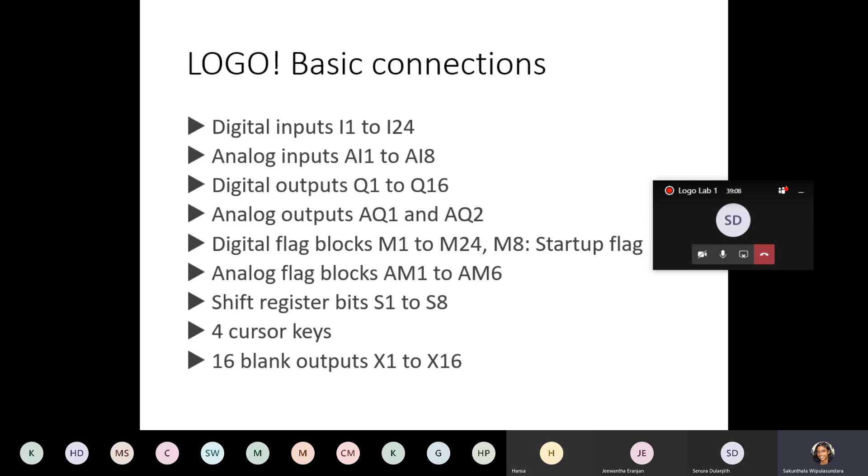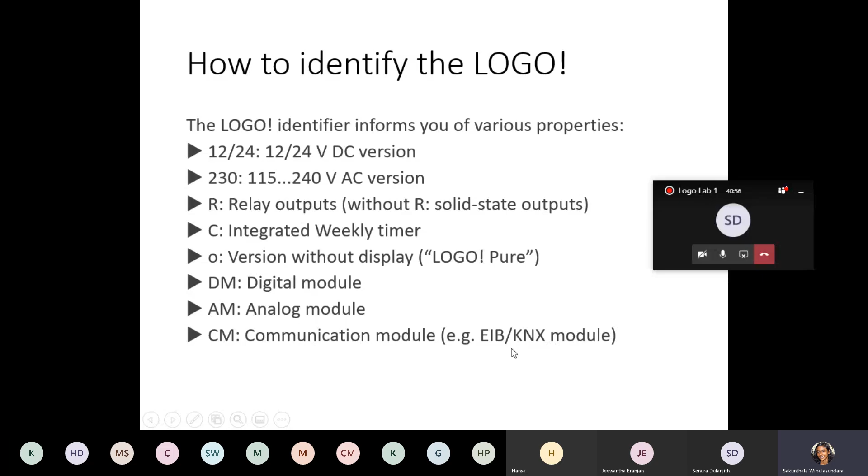Now the question is, what are communication modules? Communication modules are network modules. If you want to get the LOGO in a network, you can connect CMs, communication modules. For example, EIB/KNX, that is one kind of network that the LOGO supports, right? So you can connect such network modules as well.

And when you are selecting a LOGO, what you will basically look at will be the number of inputs, digital or analog, the number of outputs, digital or analog, and when you take digital, whether the outputs should be relay type or transistor type. I think you are aware of the differences. The transistor type outputs can do fast switching and they give DC outputs, whereas the relay type can accommodate AC or DC but is slow in switching frequency. Then the working voltages, voltage classes, will be considered. Also, the cost should be optimized when you are selecting expansion modules and main modules for your LOGO application.

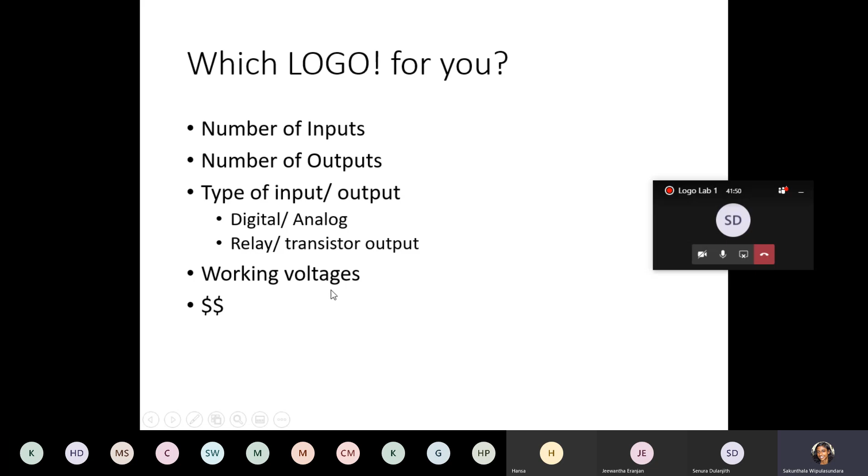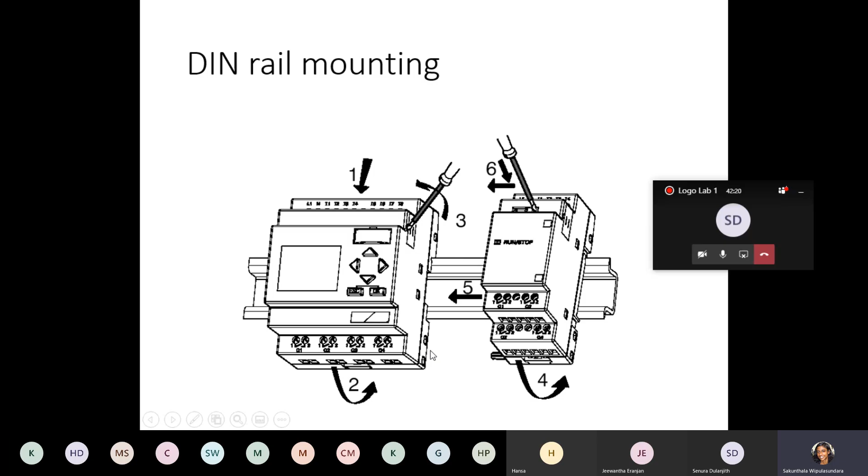And this is how you mount. You have the DIN rail running behind this, the rail that is very commonly used for many PLC mountings. You have the main module, you have the expansion module, you slide it along the rail until it fits into the grooves of the main module, and you lock it securely with the latch here. When the latch is in place, the two modules are securely fitted together so that the signals can transfer from one module to the other. There should be no gap.

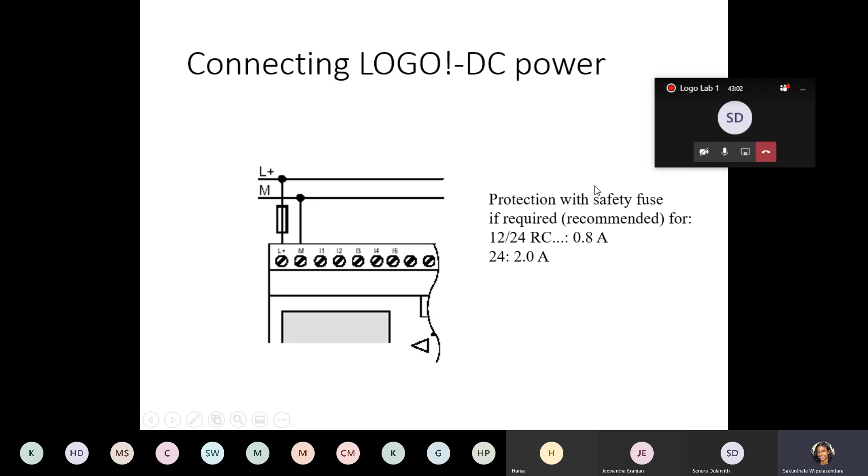All right, and then connecting, wiring. When you are going to wire the LOGO module, whether it is an AC module or DC module, it's better to use safety recommendations, right? So here there is a phase safety fuse connected. And when you are wiring for the AC version, normally varistors are used.

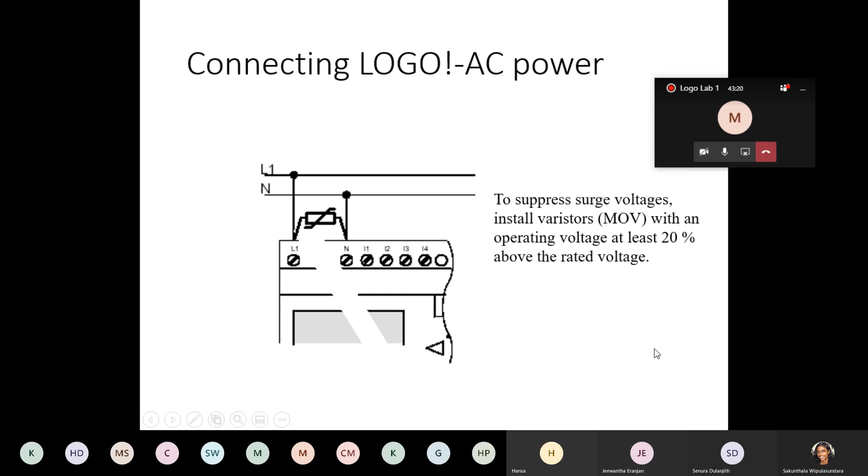Right? So what is special about these LOGO modules is, in the LOGO main module, I1 to I8, as I mentioned, there are 8 inputs. If you want, you can use all 8 as digital inputs. Or else, you can use I1, I2, I7 and I8 as analog inputs also. They will support 0 to 10 volt DC analog signal.

Right? So that means I1 and I2, I7 and I8, those 4 inputs can either be analog voltage inputs or they can be wired as digital inputs. Whatever you wire them as, the program decides how you are going to use them.

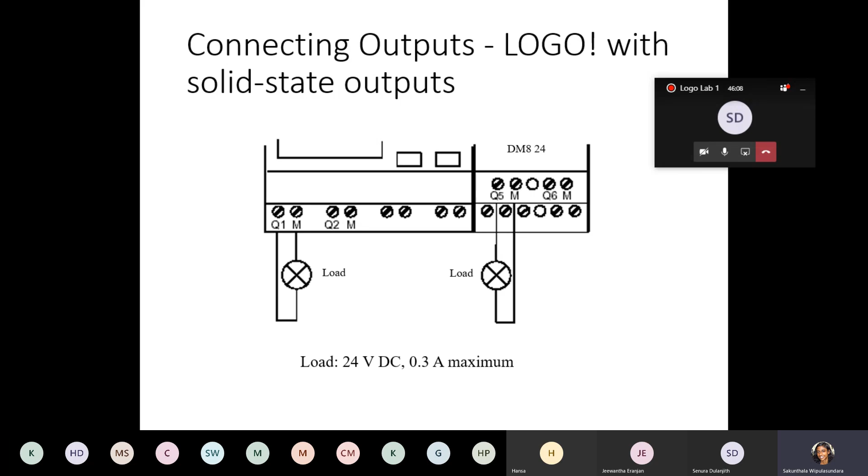Right? So you can go through these slides, and when you get an opportunity to connect an actual LOGO to a load, or to a sensor, these things will come useful. Next, we will move on to programming. So we are going to start our labs with programming so that you are familiar with how you write programs and what are the programming blocks of the LOGO module.

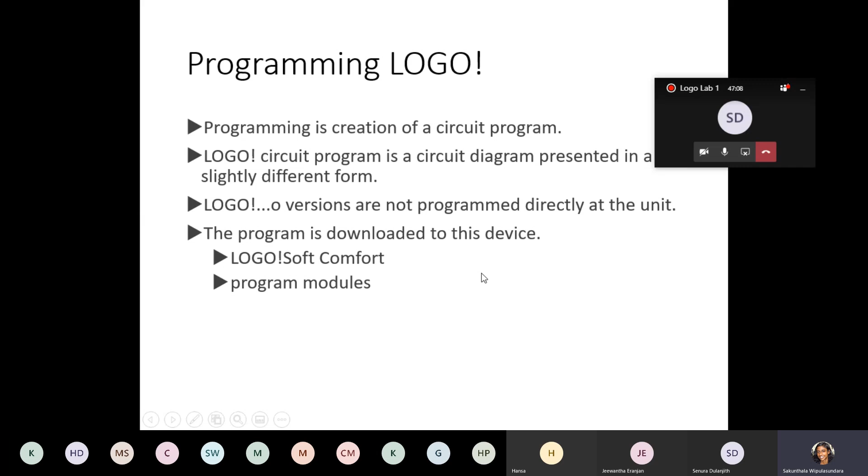So as I said, the LOGO O version does not have a display. So they are not programmed directly on the unit. For the LOGO O version, you have to always connect the LOGO to a PC or a laptop to program it. But if the LOGO is without an O, that means it has the on-module display. You can either program it using the display, the key set on board, or you can program it using a computer. Both options are available. When you are programming it using a computer, the software that you use is called LOGO!Soft. And that is the software which I shared with you.

Terms related to the LOGO program. So, when you are programming the LOGO using the key set, using the small screen on the LOGO, you should specially remember these terms. When you are programming it using the software, these terms are available, but you have a lot of options because you can even refer the help. When you are using the LOGO display to program, the facilities are very limited. You cannot refer the help. Therefore, you have to be thorough with the terms, or else you have to refer a catalog while you write the program on the display.

Connectors. The first most common term that you use are connectors. What are connectors? Digital and analog inputs and outputs are all called connectors. Digital connectors are named as capital I1, I2, I3, I4 and so on. Whereas analog input connectors are labeled as AI1, AI2, AI3 and so on.

Then output connectors in LOGO: digital output connectors are labeled as capital Q1, Q2, Q3 and so on. And analog output connectors are labeled as AQ1, AQ2. Right? So I can't say so on there. Why? Because analog outputs are limited to 2. AQ1 and AQ2, that's it. Is that clear?

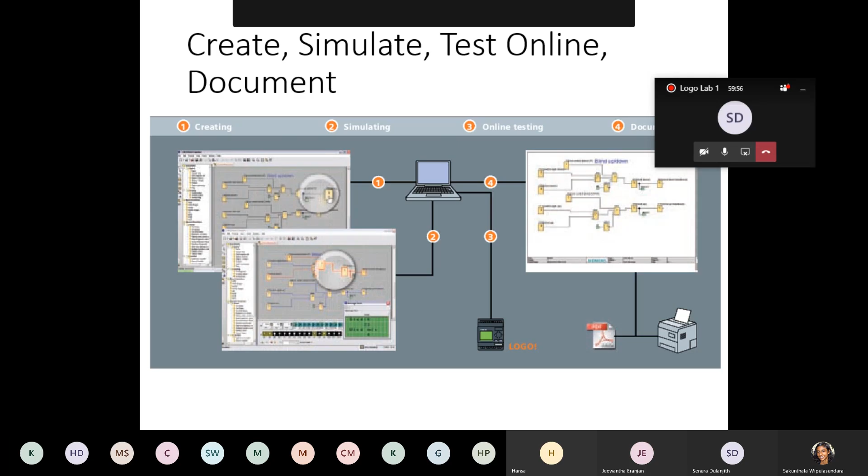Right. When you look at your Logo module, as you start your program, you will find menus. You have the program menu, the card menu, clock, right? These things you can read for additional information, and I will explain them as I come across them. The programming menu will have edit. That's the most important thing you will require at this point, to go to program mode, go to edit mode and write the program. This comes in useful when you are using the display on board. When you are using the computer to program, you don't need to pay much attention to these menus, because when you load the program, the Logo module will go to stop mode. You load the program and run it again.

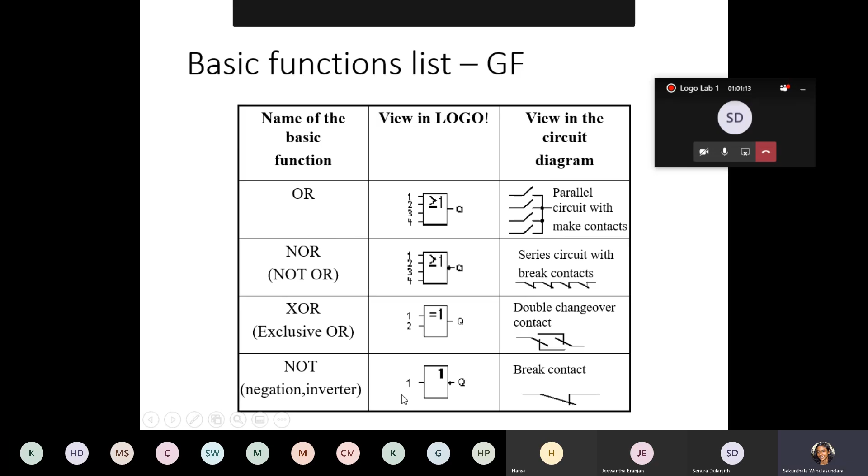So just to give you an overview, not to have you memorize these things, basic functions are these: AND operation, AND with edge evaluation, NAND, OR, NOR, XOR. These are all the GFs, basic functions. Then special functions. We have on delay timers, off delay timers, on off delay timers, retentive on delay timers, relays, wiping relays, pulse generators, counters, message text. So you can see that the number of special functions is larger.

And as the Logo evolved from version 3 onwards, 3, 4, 6, 7, 8, the special functions increased in number. So newer Logo versions have more special functions than older versions. Therefore, using new version Logo software, you can program an old Logo hardware module, but using old Logo software, you cannot program a new Logo hardware module, because as the Logo evolved, special functions have increased.

Right. So now let's move on to some hands-on exercises. When we are programming the Logo module, we can use many programming languages. You must be familiar with computer programming languages such as C, assembly, VB. The languages I am going to talk about today are different from normal computer programming languages. These are PLC programming languages, meant for PLCs. There is a standard, the IEC 61131-3 standard, right? When you read the literature, you will find that information. Under that standard, there are 5 programming languages for PLC programs.

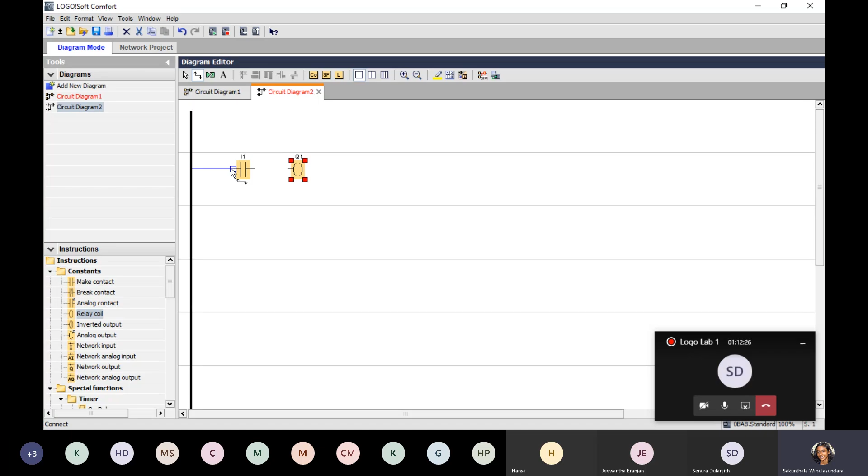Next, to represent the bulb, we take a coil. Again, you can change the label. By default, it has taken Q1 digital output. If you want, you can change the label. I leave it as that. Then I connect from the power rail to the input and to the output. And there is no 0 voltage line. The network terminates here. Right? So this is your very first ladder program.

Alright, so are you working with me? Have you come up to this point? Alright, everybody? Yes.

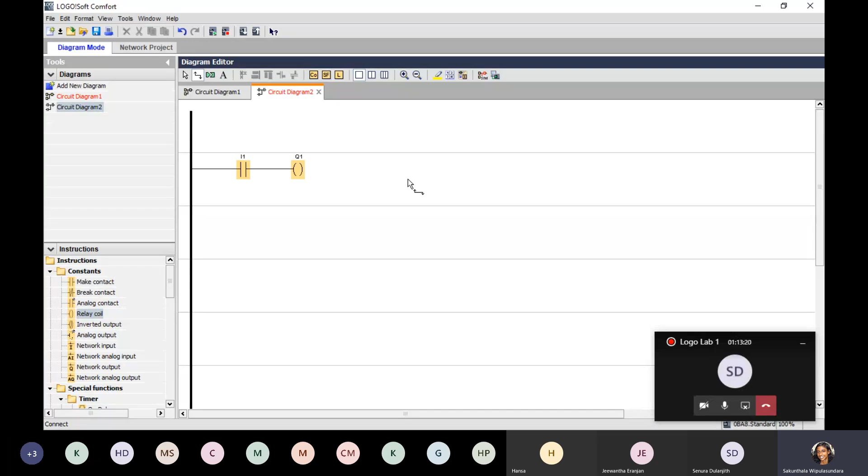Okay, right. The next thing we do is, since we don't have the physical hardware to load this, and even if we do, we first simulate, right? How do you simulate? You go to sim. You can see a switch and a bulb. You run the simulator, you turn on the switch, power will flow to the bulb. You turn off the switch, the power terminates here. Bulb is not illuminated.

Again, turn on the switch, the bulb will light up, turn off, it turns off. So the switch is being used as a detent. You can turn it into a push button because our question says push button. Right click on the simulation switch, go to simulation parameter. It is already by default a switch. You can make it a momentary push button.

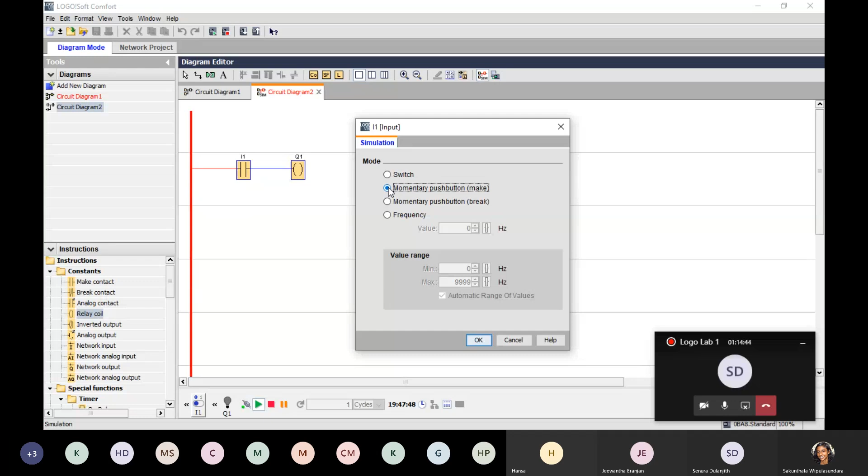Okay? Right. Now what happens? When you press it, the bulb lights up. When you release it, it turns off. You cannot leave it pressed. Is the difference clear? I hope everybody is following.

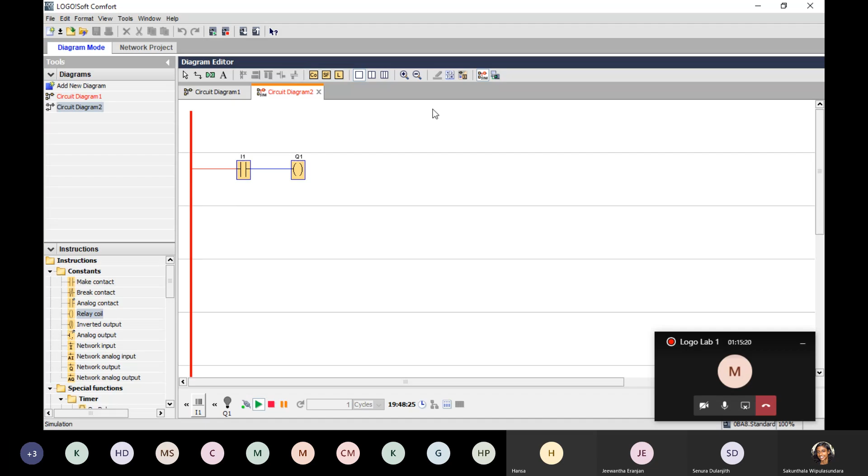All right. Okay. So now if you are satisfied with the program, you turn off simulation and you save this as, I will save it in the same folder that we are using.

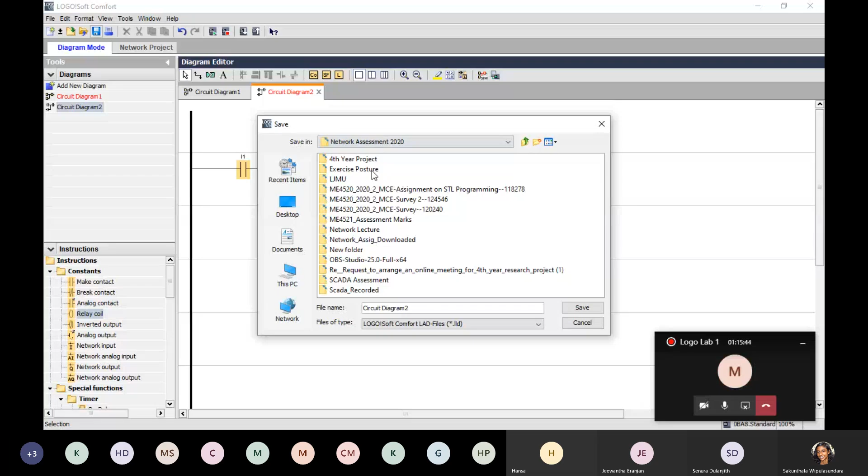Ladder 1. That's done. So you can close the circuit, close everything. It will look blank like this. If you want to open again, open. It will look like this. Open. Right. So I hope you are clear with this. This is a simple ladder program.

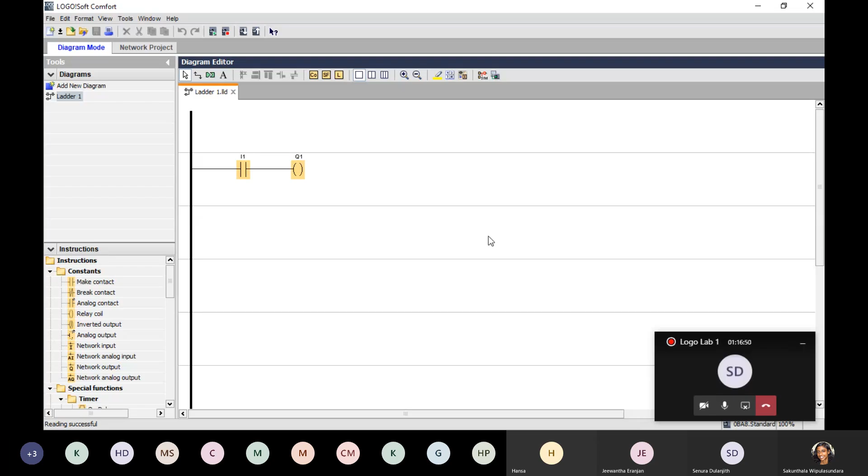Right. The next thing I want to tell you about is there is another programming language. The other programming language is called function block diagram. FBD, function block diagram. So you can take another new diagram, right? Add new diagram, double click on add new diagram. Say OK, right? This is the new circuit diagram, and by default it is taking the function block diagram language.

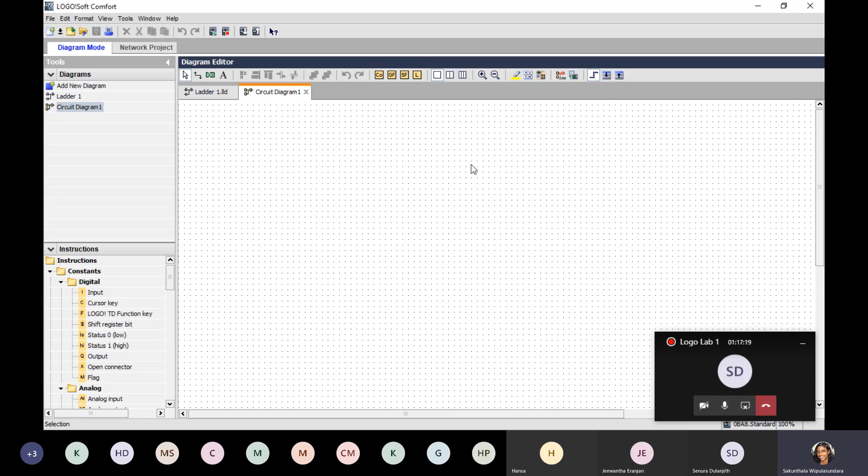Right? So if you are going to connect inputs and outputs using function block diagram, they will look like boxes, right? If you take an input, it will look like this. If you take an output, it will look like this. You are just simply connecting an input to an output like this. If you simulate, again, switch to bulb, right? You connect, the bulb illuminates when you turn on, when you turn off, the bulb turns off.

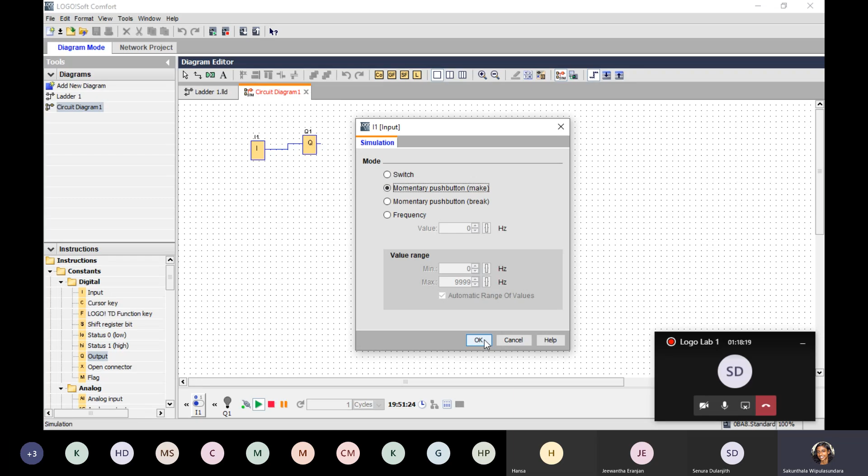Again, you can make this simulation parameter push button if you wish. Right? This is a switch. If you want, you can right click, go to simulation parameters and make it a momentary push button if you want. So that as long as you keep it pressed, it's on. If you release, it's off.

Right. The other thing is you can also convert between languages. If you want to convert this into ladder, go here, convert to ladder. It will look like this. So these are the two languages that we most commonly use.

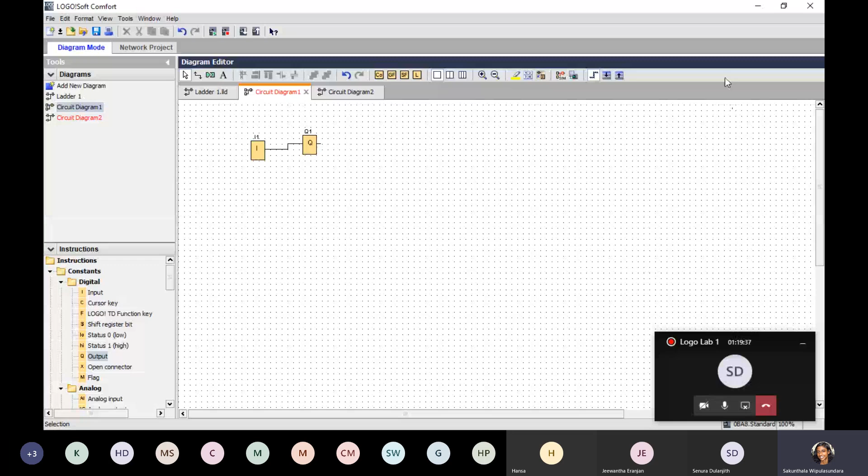Are you okay up to this point? Is it clear? Do you have any questions? All right. So I hope you are clear, right? Okay. So shall I continue with the presentation? Yes, ma'am.

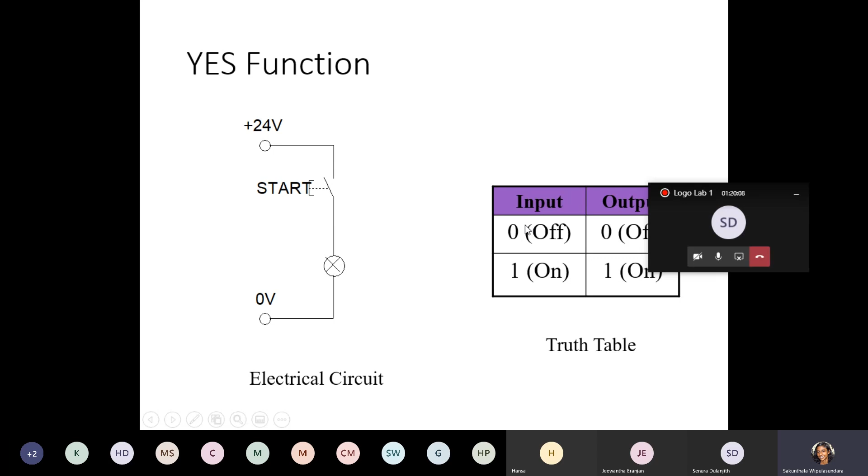This is the exercise we tried and an overview of what we did. We had the switch connected to the bulb, the electrical circuit. If the input is off, the output is off. If the input is on, the output is on. So we tried the electrical circuit, and then we converted it into a ladder program. Next step is, can you try this example? Shall we draw the ladder language program for this exercise? Okay, you can take some time.

Okay, so I'm going to stop sharing my screen. One of you can work this on the ladder program and show me by sharing your screen. I would like to see one or two of you sharing your screen. All right, go ahead. Do you remember the question or do you want to see the question again? Ma'am, can we see the question again? All right. Okay, quickly sketch it, and quickly draw it using the ladder language.

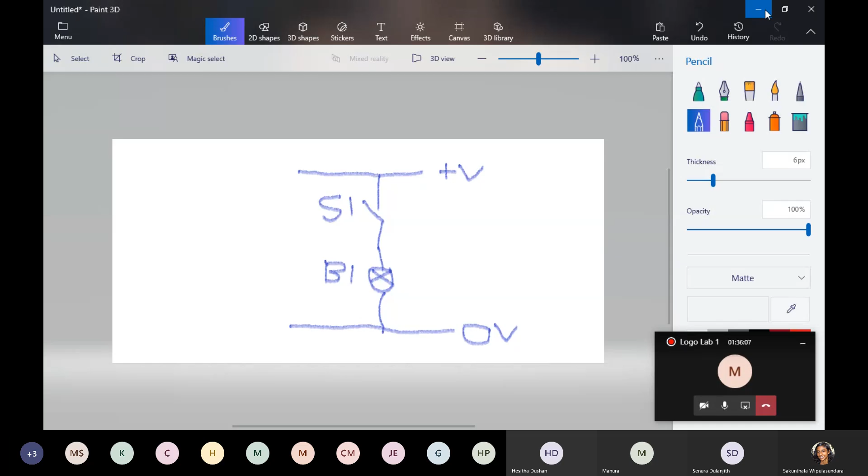Okay, so can I see somebody's screen? So then we will look at the program actually. I don't think you will need a sketch because you are familiar with the sketching part by now. I will go to my ladder 1 again. I will remove this, delete this.

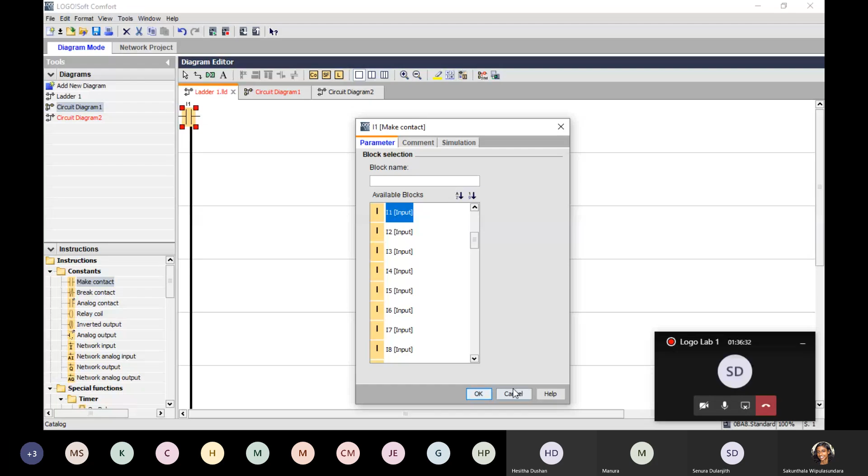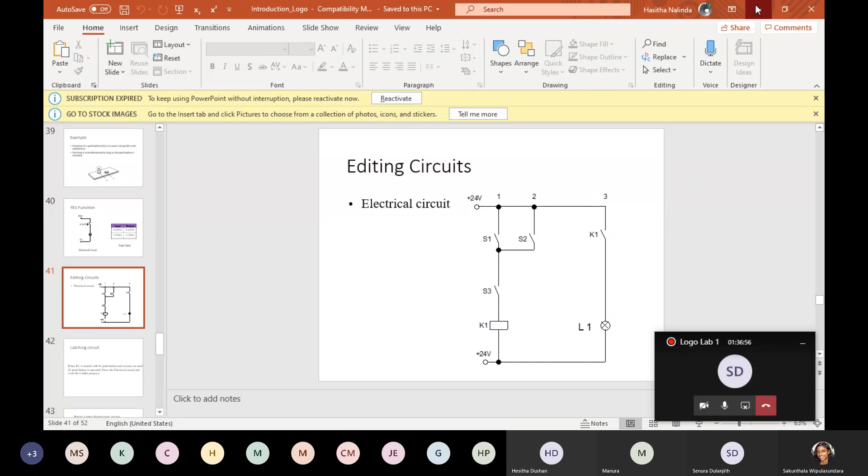I will take an input I1. Right? So we have I1. Let me look at the question again. Yes, I1 and I2 in parallel, that in series with I3. So I have I1 and I have that. I make it I2. Drag it over there. I1 and I2 in parallel, in series with I3. I select I3, right? Drag it over there. Connect. I1, I2.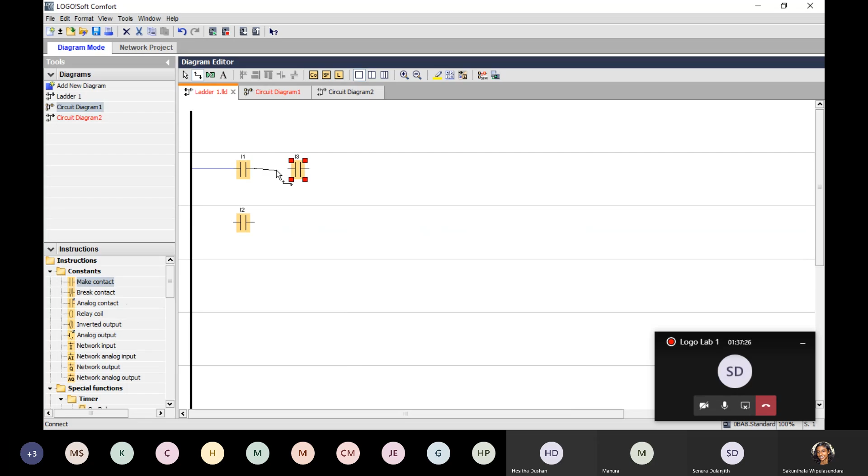Alright. Clear up to this point? Ma'am, how did you connect both of those to I2? Both of those to I2. You mean this line? I1. Yes. Connect those together. It's an incompatible connector. Wait. I will remove this and do it again then. Delete this. Delete this. Right.

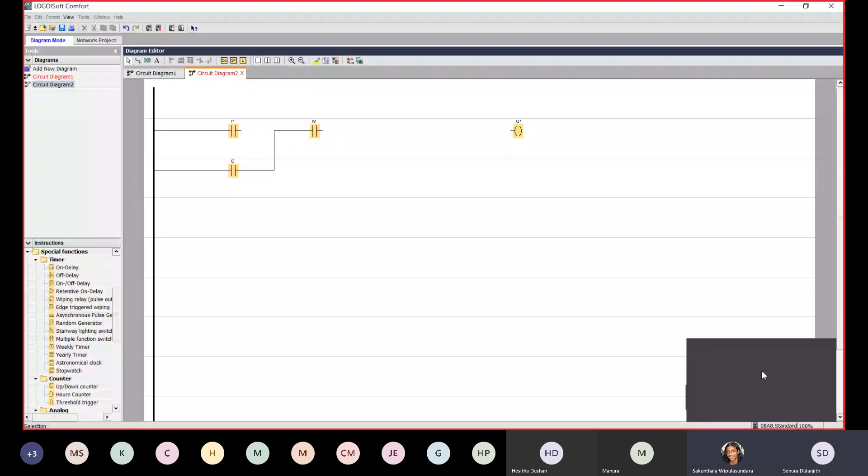So that means it says this is what is incompatible. You cannot connect this to this, right? You have to connect this I2 terminal to the input port of I3, right? Then you have to connect I1, right? You can't go here. You have to go here.

Clear? I don't think we can see that. I can't. Sorry. I'm not sharing the screen. Okay. How come? Now can you see? Alright, I will remove everything again. Now can you see? Yes? Can you see the screen? Yes. Alright.

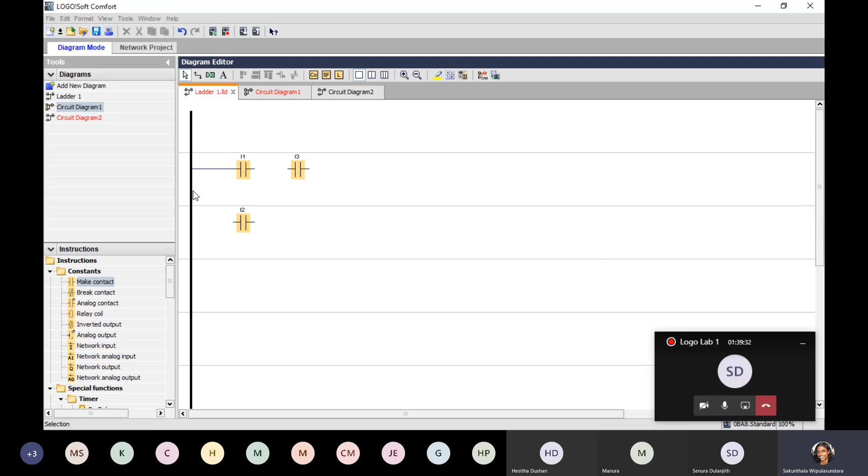You connect. You press and drag the power rail to I1. You press and drag the power rail to I2. I hope you are clear with that. If you take I2 and try to connect to I1, it will say incompatible connector. Therefore, you don't do that. You press I2 terminal, drag and drop onto I3. Then it will be fine. You take I1 connection, you can't go to I2, incompatible, go to I3 and connect. Hope you are done now.

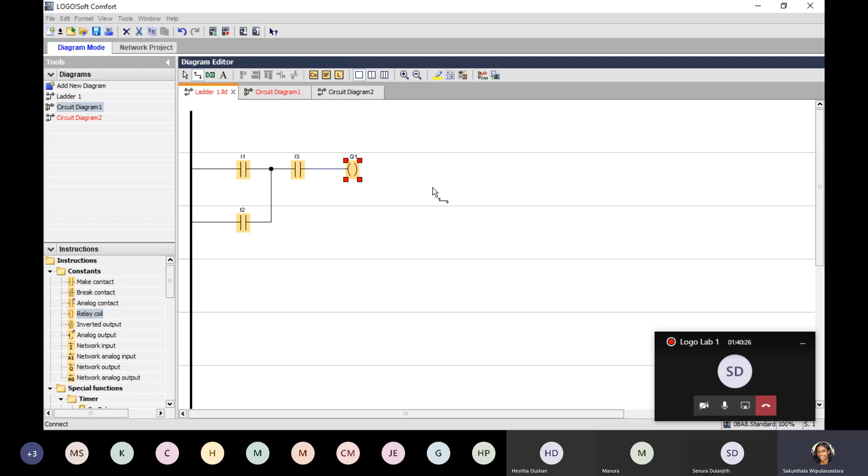Final step, take the relay coil. Place it there. Connect it to that. Alright, clear. Is it clear? Are you following me? Yes, ma'am. Yeah, please do this, right? Because this is meant to be a hands-on session and I want you to actually be familiar with the software, and if you have any questions now itself, you can clarify them.

Go to simulation mode. Since these are all push buttons, right click. But we have a difficulty pressing 2 buttons. Alright, I will leave it as switches. If you turn on I1 alone, nothing happens. If you turn on I2, nothing happens. If you turn on I1 and I3, the bulb illuminates. If you turn on I2 and I3, the bulb illuminates. Okay, so I hope you are clear.

Alright, now tell me, if we are going to write this program using function block diagram, using blocks, boxes, what will you do? How will you write it? We can convert this, ma'am. Yes, we can convert this. Or if you are writing from scratch, what are the boxes you will require? It is a simple thing. When you think of this circuit, you can see 2 inputs in parallel. When there are inputs in parallel, what is the logical operation that we use? This switch or this switch. We say OR operation.

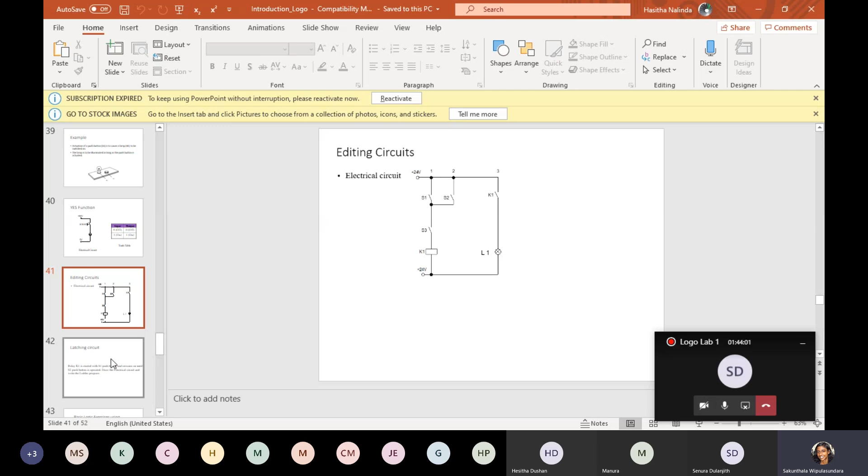You got an understanding of what the ladder language is like and what the FBD, function block diagram language, is like. Okay. Right. So I think we should proceed now. Look at the next question. Alright. So there it's a little bit different. Read this question and then try to find a solution. I want you to work first in ladder language.

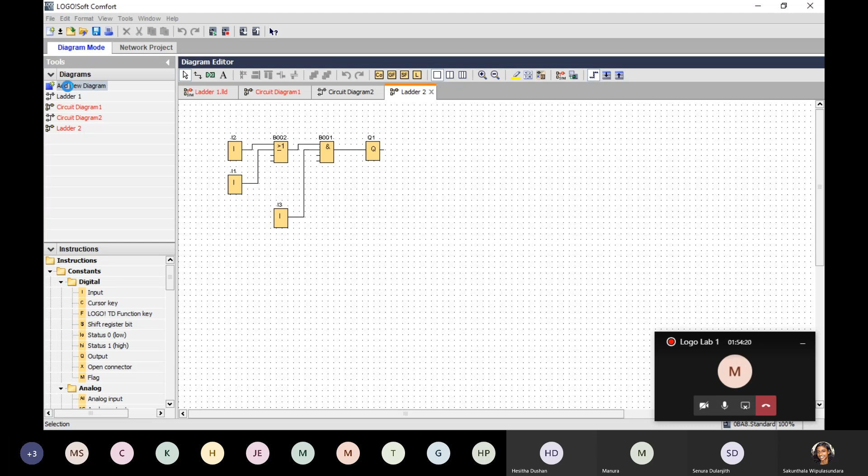So this is the question, and we will find a solution for this. Okay, so taking a new ladder diagram. All right, add a new diagram. If you want, you can give the name settings, or you can leave it blank. You can enter these IP addresses and stuff later when you are actually connecting to the LOGO module. I'll leave them blank, right? Then I will set the programming language to ladder, right?

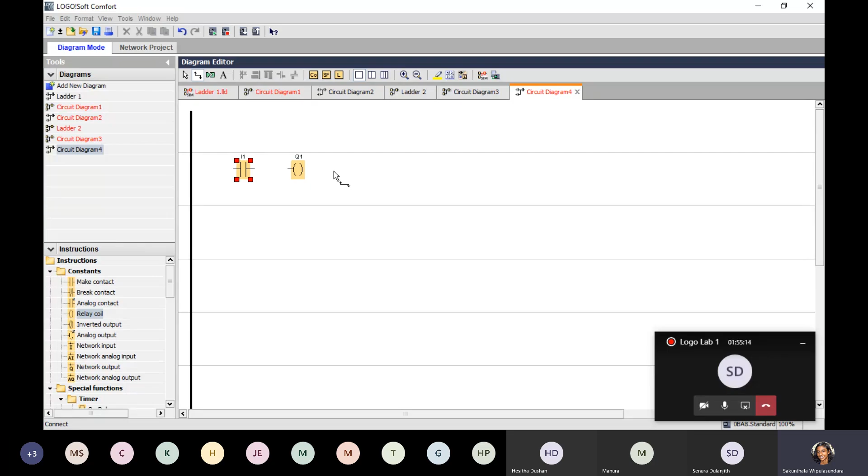So what it says is when S1 is pressed. So initially S1 is wired to I1 terminal. When I1 is pressed, we want the output to turn on. We take the output, right? Now what? When S1 is pressed, you want the bulb or the output to turn on, right? We can simulate this easily like this. When S1 is pressed, the output turns on. When S1 is released, we still want the output to run, right?

But here, in the previous scenario, the very first one we tried, if we draw the ladder diagram like this, what happens is, when S1 is pressed, fine, the output turns on. But when S1 is released, it turns off. Now we need some method to keep Q1 or the output energized eternally. Very first time it should be triggered by I1, but after that it should be running by itself. This running by itself is obtained how? What is the tactic used here? I hope you can hear me and you can see the screen.

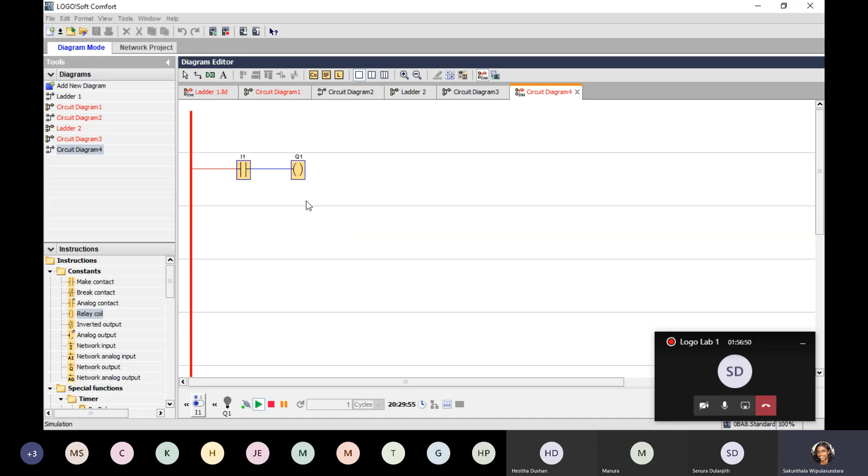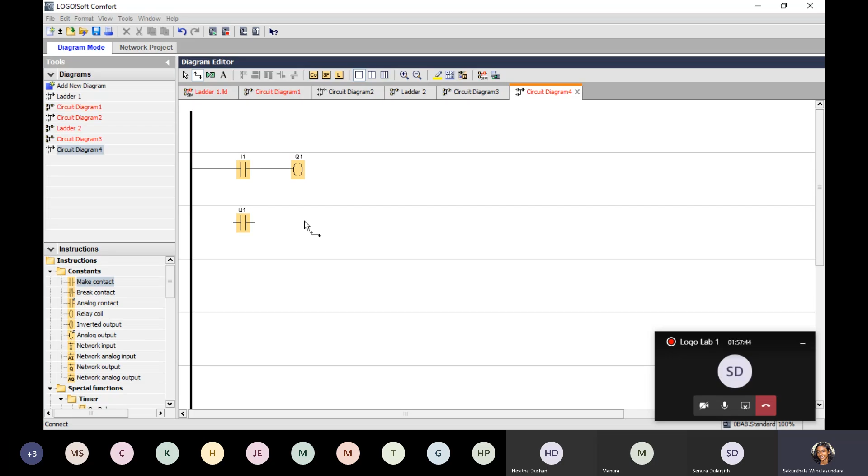Yes, ma'am. Alright, so what is the scenario that is used to keep something energized eternally? We take another contact, a make contact, right? But this time we label it as what? Q1 itself. See, it is a contact that we take, right? But now we don't label it as an input. We label it with the same label as the output. So what we are doing here is we are trying to make Q1 energize itself. This scenario you may have come across in normal hardwired relay circuits. We call this a self-holding or latching circuit.

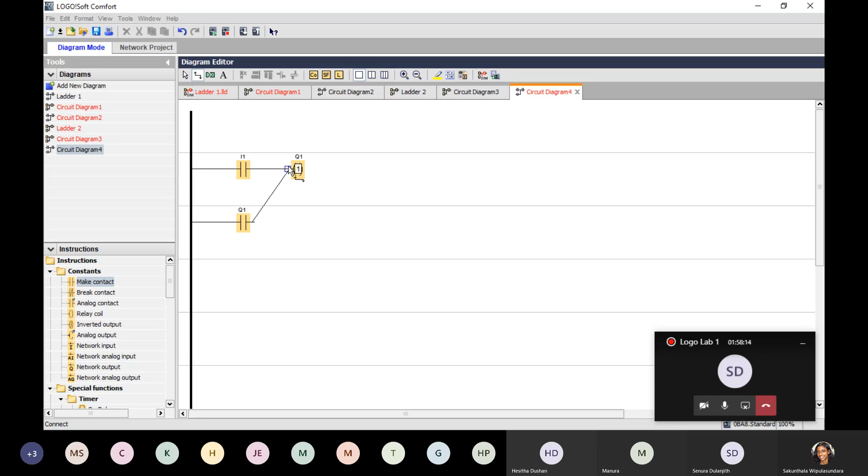What we do now is we take a contact. This is I1, digital input I1. This is the digital output memory itself. We connect this terminal over here. It will be incompatible if it goes here. Go here. Like that. Now what happens? Now if you simulate, as long as nothing is pressed, the output is not on. Still the output is off.

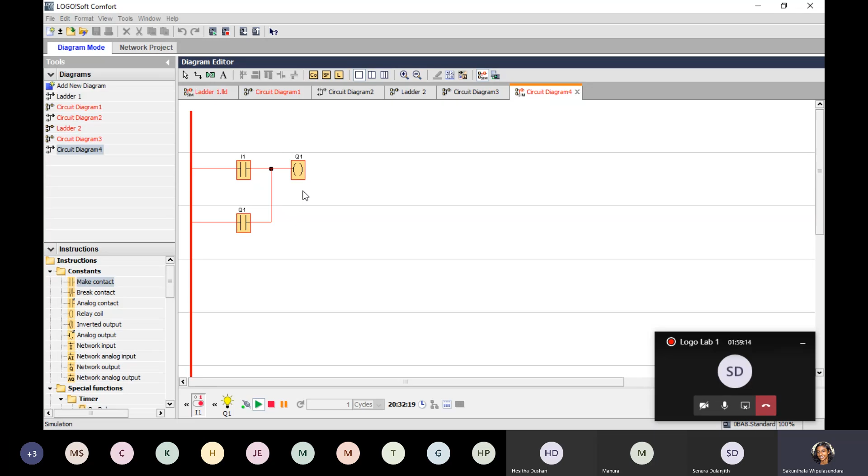If you press I1 for the very first time, what happens? I1 turns on Q1. This Q1 energizes this contact, and now there is a path connecting power to Q1 coil. The Q1 contact energizing the Q1 coil is known as self-holding or latching. Now if you turn off I1, I1 is not illuminated, but the power flows from this side. So this self-holding mechanism is necessary when you want something to be turned on and left continuously in on state.

Is this clear? This is one of the key points that you will require in your future ladder programming. Alright, so I hope it's clear to everybody. Now it is on and it is eternally on. Now we need to find a method to turn it off. And we have a method in the question. The question says Q1 remains on until I2 is pressed.

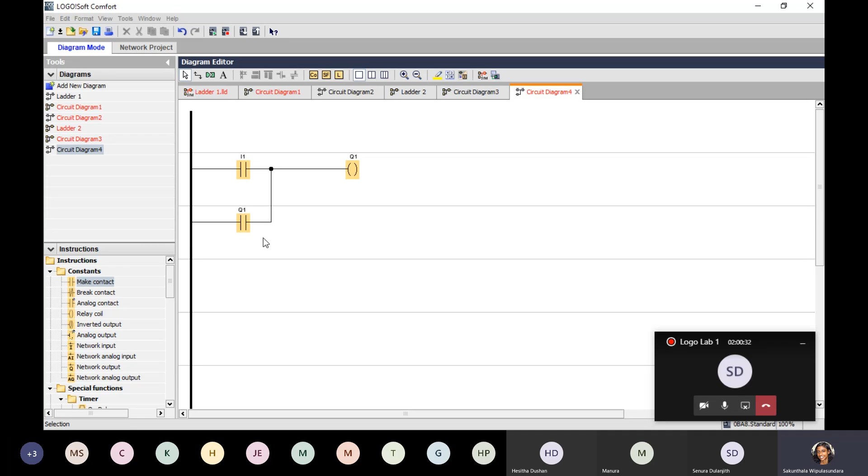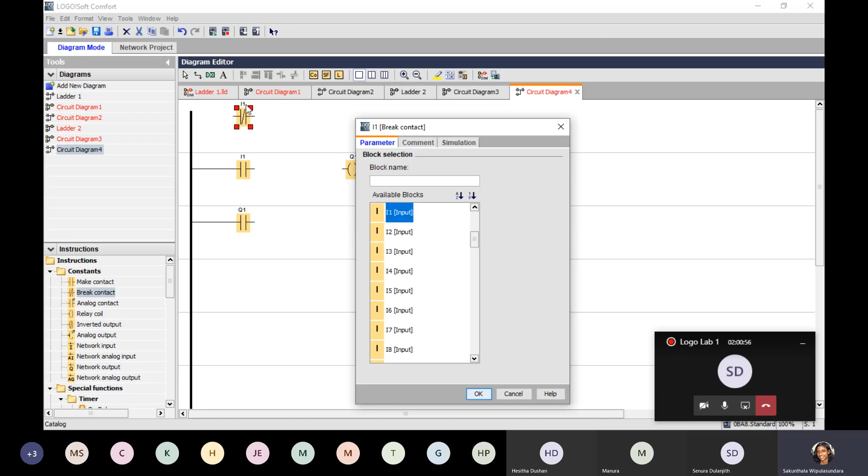Until. So, what we'll do is we'll pull this way. We know that this network is the self-holding network. You need to disconnect the power, break the power of this line by pressing I2. Therefore, we take I2 in the form of a break contact. See, I1 was a normally open contact, that is to make the circuit. I2 is going to be a break like this.

I2 will break the self-holding path. I2 is in series, or is common to both the paths, like that.

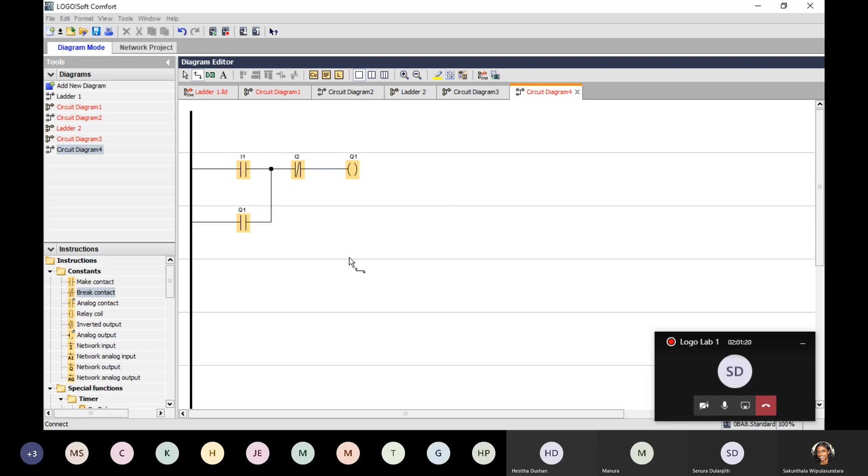Now what will happen if you simulate? When I1 is pressed, Q1 is on, Q1 remains on. When I1 turns off, now both switches are off, still the output is running, output is on. If you want to break, you turn on I2, it will disconnect the power and stop the output.

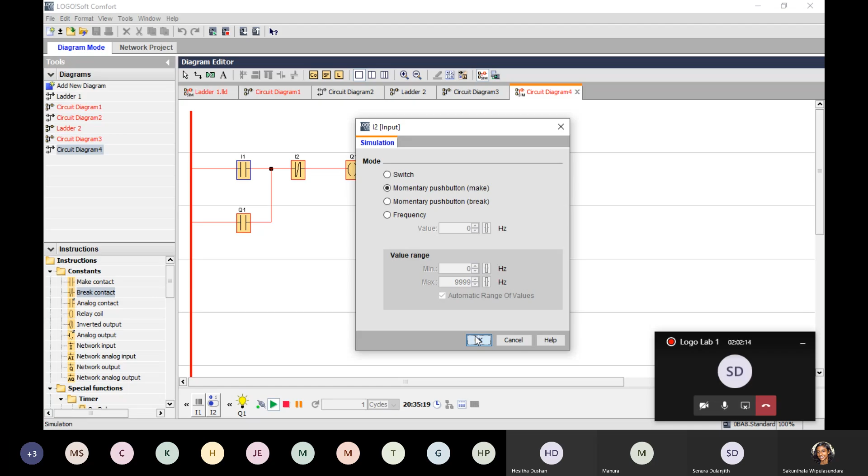Now you can even turn these into push buttons. Still it will be the same. Right click, simulation parameters, momentary push buttons. Same here. Turn on, turn off. When you turn on, you just see nothing is on.

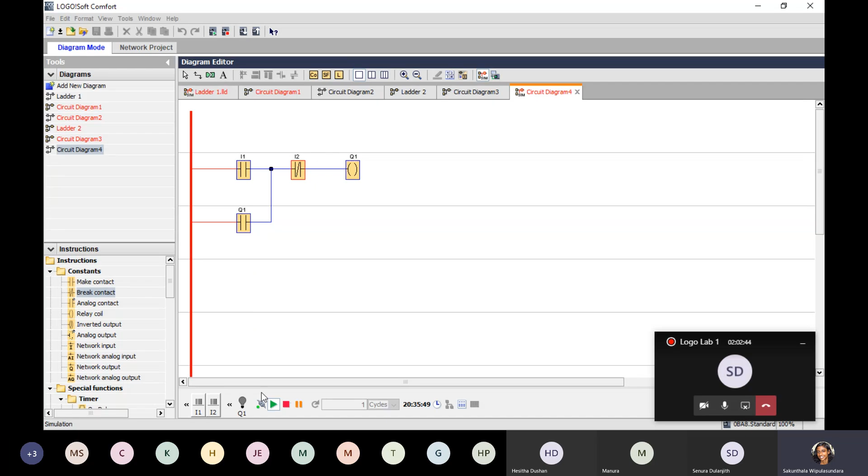Press I1 and release. I1 is off, system is still running. Press I2 and release. See? Output turned off. Okay, so this is the self-holding or the latching network that I was trying to explain.

Do you have any questions? If you need any further clarifications, please ask. Okay, are you clear?

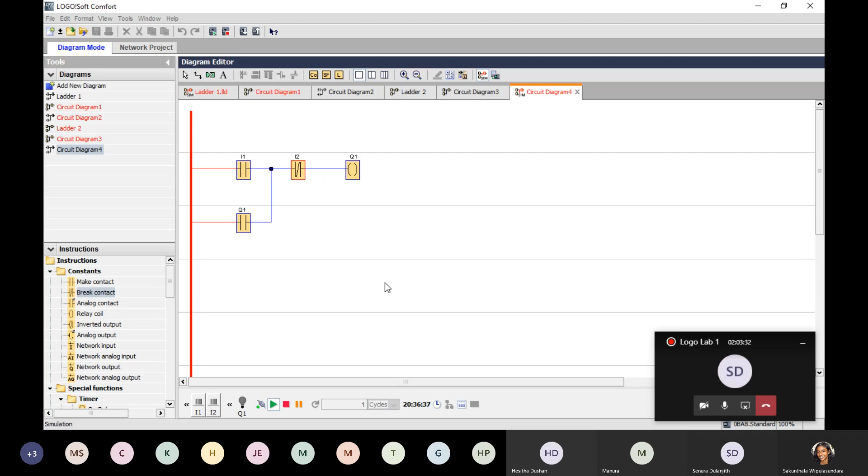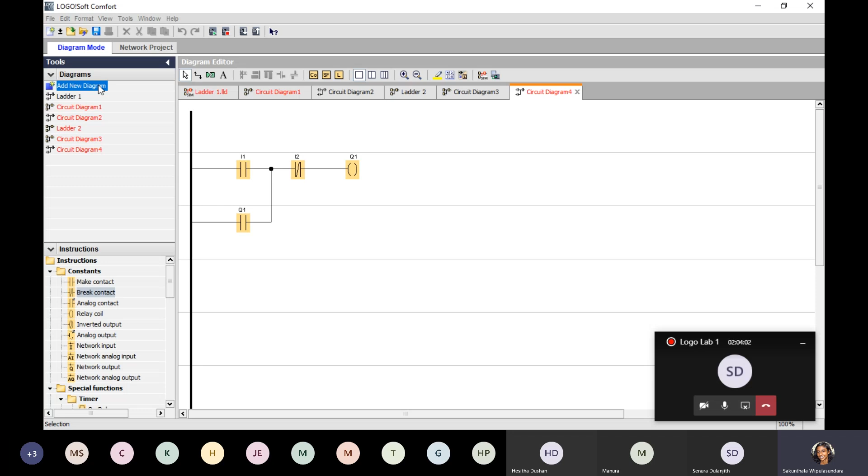If you are clear, shall I quickly show you how you work this using function block diagram? There is an easy way. You can also use OR logic and AND logic. You can do that. You can try it at home as a homework. But another easier way is there. I will show you. Add a new circuit diagram. So this is function block diagram by default.

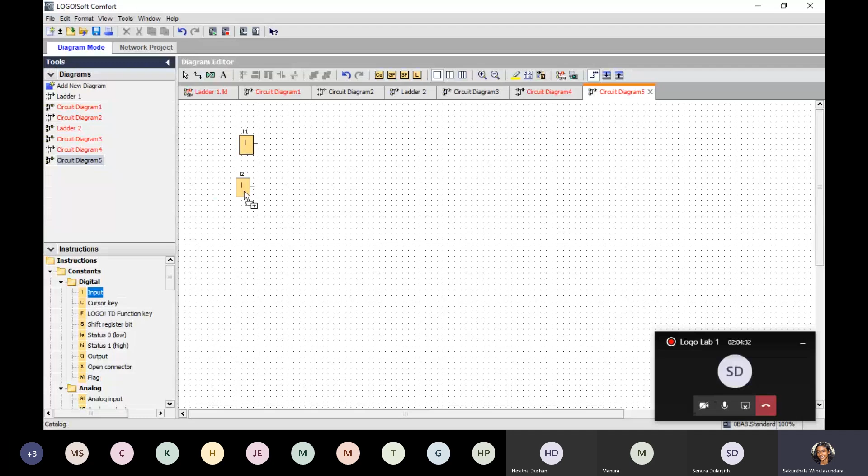Using your constants, take an input. Take one digital input I1. Take another digital input I2. This is going to start the output. This is going to stop the output. So you can even do it in ladder. You can rename. You can call this as start. Give comments. You can rename this as comment. See, it will show the name. Start and stop. Right?

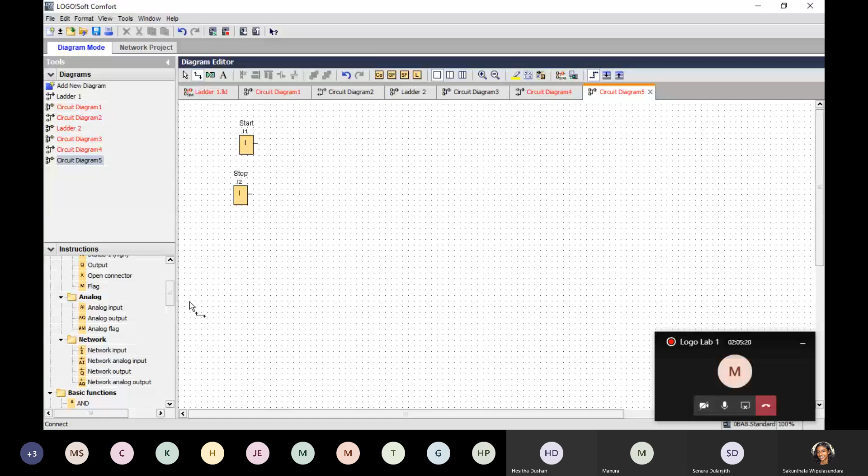Next thing is under your special functions. Under miscellaneous, you find latching relay. Special functions, miscellaneous, latching relay. You drag the latching relay onto your screen.

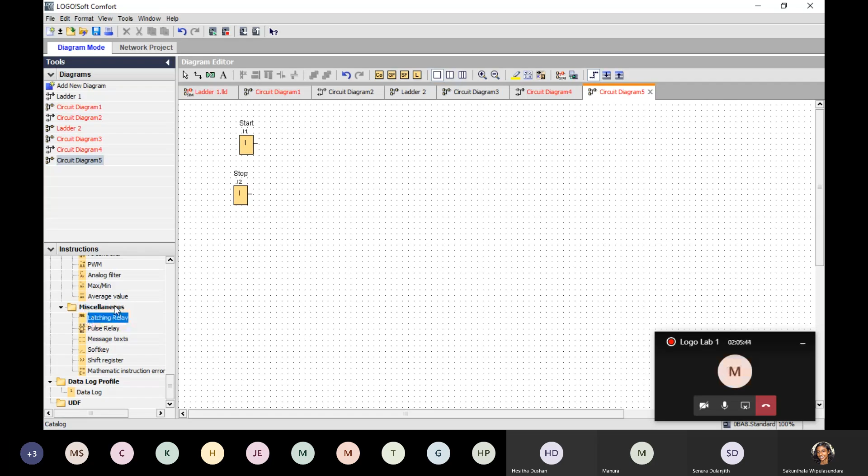When you take your cursor near the inputs, right? If you take the arrow and take it near, you will see an S input, which stands for set. A reset input, R. R stands for reset. To the S input, you connect your start. To the reset input, R input, you connect your stop. Now this latching relay will take care of self-holding so that the output will be operated by it. You take the output and connect it over there.

Now if you simulate, when you press the start button, the latching relay will operate the output. When you release the start button, now no power coming, still the latching relay holds the digital output in the on state. Now you press the second button or the stop button. See, it resets the output.

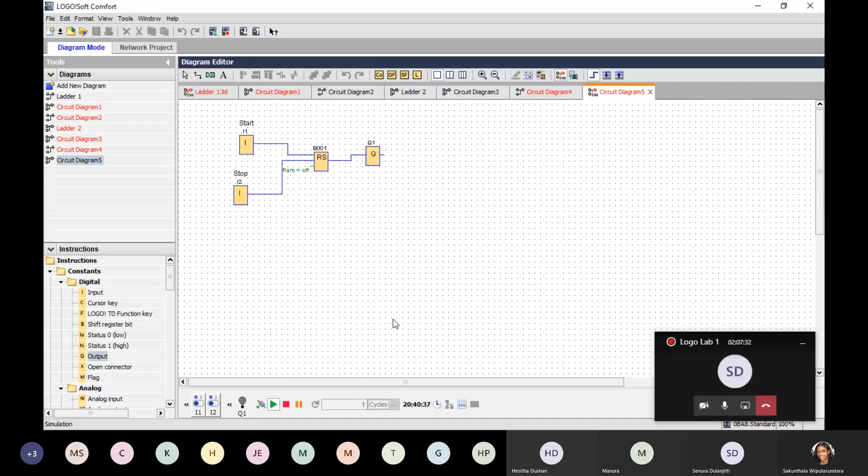Okay, are you clear? Do you have any questions? Yeah.

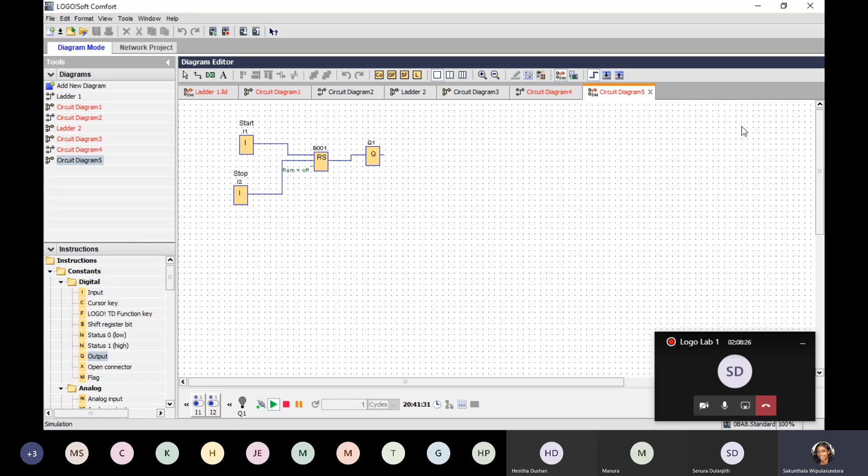Okay, so if you are clear now, what I will do is I will wind up the first lab session here and I will give you some homework. You can try this out to clearly see whether you have understood what we discussed. You can take down the homework.